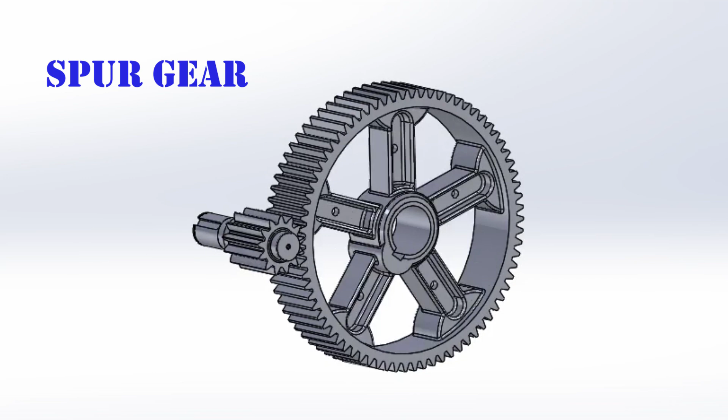In the previous episode, we discussed that a gearbox is composed of shafts, bearings, gears, and an internal lubrication system. The efficiency of each gearbox is based on the internal arrangement of their gears. So let's talk about gears. First gear I want to talk about today is spur gears. Spur gears are the simplest of gears, and they're what you normally envision when you think of a gear.

A spur gear transmits torque only on one tooth at a time. They're usually found in slow speed applications and normally not utilized in multiple reductions. Spur gears are very inefficient with poor lubrication qualities. They're rarely seen in enclosed gear cases, but normally with guards and are grease lubricated.

The American Gear Manufacturers Association, or AGMA, is the trade group of companies involved in gears and related power transmission components. AGMA ratings measure the quality ratings of the gear as they are manufactured. The higher the AGMA rating, the higher the quality and efficiency of the gear. The AGMA rating for spur gears is normally low due to the type of metallurgy and gear finish. Two examples of spur gears in industrial settings are on chip silos and cement kilns.

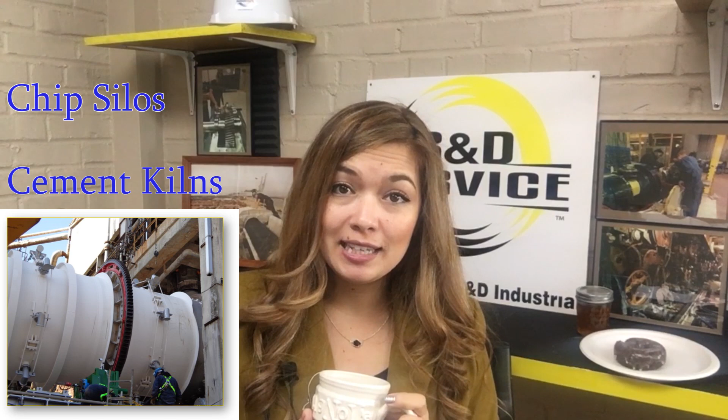The second gear I'd like to discuss is a worm gear. A worm gear is usually made of two materials. The worm shaft is normally made out of hardened steel, and the worm gear out of bronze alloy. These two metallurgies lubricate well together. The output shaft will be at a right angle from the driver. There are many different designs of worm gears, some more efficient than others.

The number of starts and pitch of the worm determines the total reduction of power rating. Worm gears have reductions up to 80-to-1 ratio. They are economical to maintain and purchase and have good overhung load capabilities. Worm gears are versatile and conducive for tight spaces. Easy to maintain, but they are not that efficient. Some examples of worm gears are pulleys, sprockets, and conveyor drums.

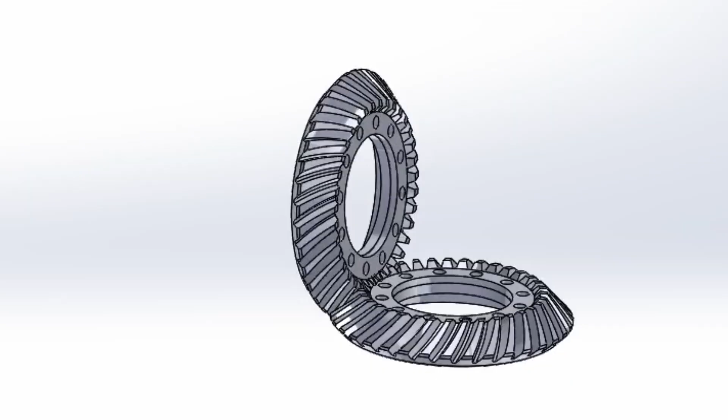The third gear today is a spiral bevel gear. Spiral bevel gears are normally utilized when torque is transmitted at a right angle to the prime mover. Bevel gears can also be utilized in conjunction with standard helical gearing to where the shafts are 90 degrees opposed to each other. Bevels are a very efficient form of gearing with close space limitations. Proper mounting dimension and backlash must be achieved in the initial setup. The lubrication properties are excellent when proper setup is achieved.

The fourth and final gear we're discussing today is a helical gear. Unlike the spur gears, which only transmit torque one tooth at a time, helical gears have multiple teeth that share the transmitting of torque due to helix angle and tooth profile. Helical gears are the most commonly used gearing for enclosed gearboxes. They're excellent for multiple reductions and have excellent lubrication qualities. Helical gears are currently one of the most efficient ways to increase torque and transmit horsepower in industrial environments. Helical gears are found in concentric and parallel units.

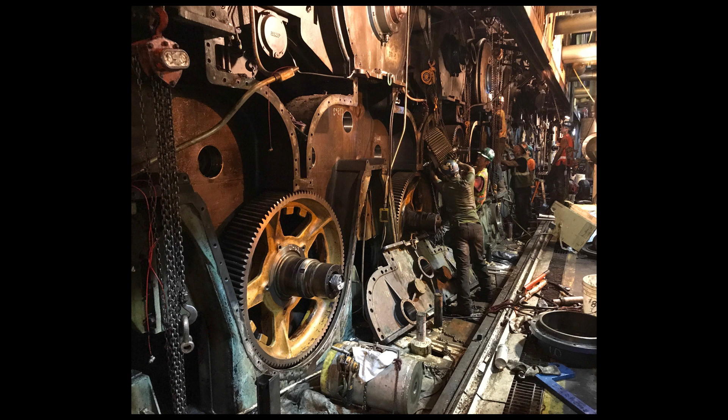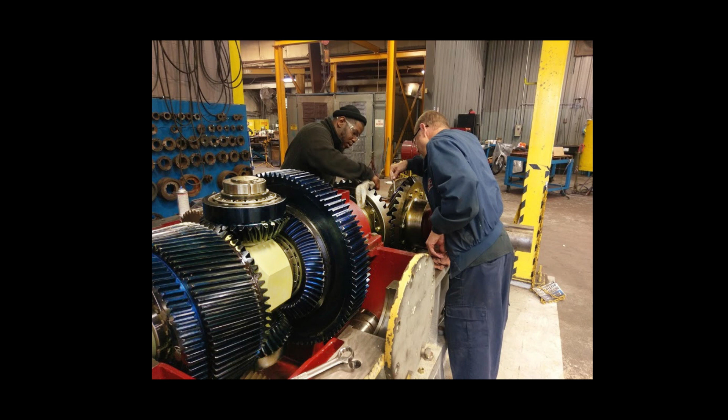All of the images that you see behind me feature gears. This is a picture of a paper machine. A paper machine has a ton of dryer cans that are constantly rotating to make the paper flow through and dry from one end to the other end. Those dryer cans are rotated through the use of gears. This is a picture of a gearbox rebuild. This is a size 6 differential and has helical gearing and bevel gearing, as we discussed earlier. This allows for this box to accommodate multiple arrangements as well as multiple load capabilities.

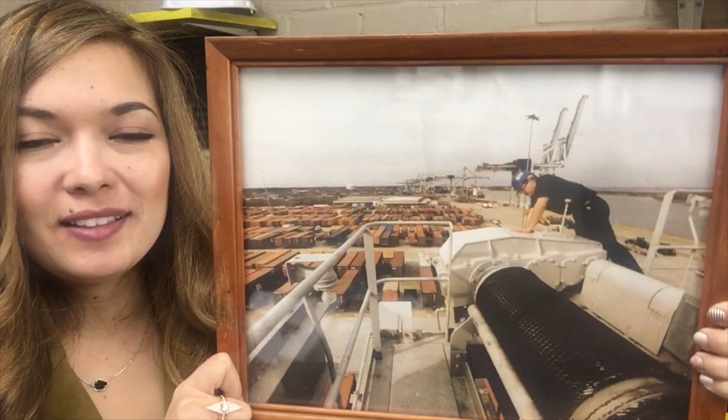This is another picture of a gearbox rebuild. If you watched the last video, what kind of unit is this, guys? Say it with me, it's a parallel unit. It's parallel because the high-speed input shaft is parallel to the low-speed output shaft. This gearbox utilizes helical gearing, as you can see, because the teeth have an angle which allows for more tooth contact versus having a spur gear, which would just be straight across. Last but not least, this vintage photo that I found features a gearbox that winds and unwinds the cable drum of a crane. This gearbox certainly utilizes helical gearing on the inside.